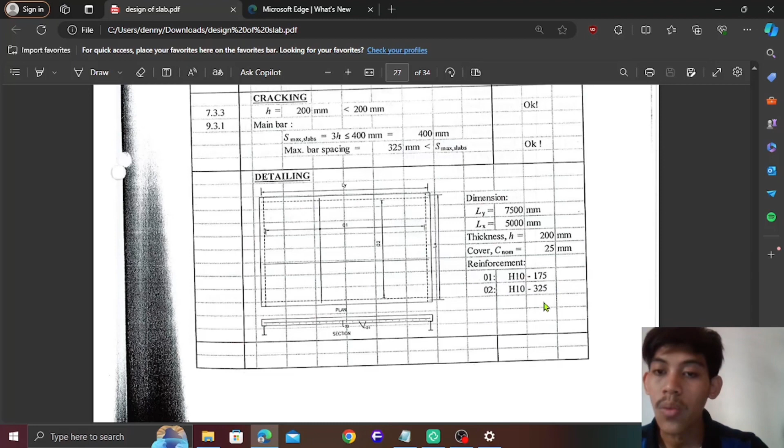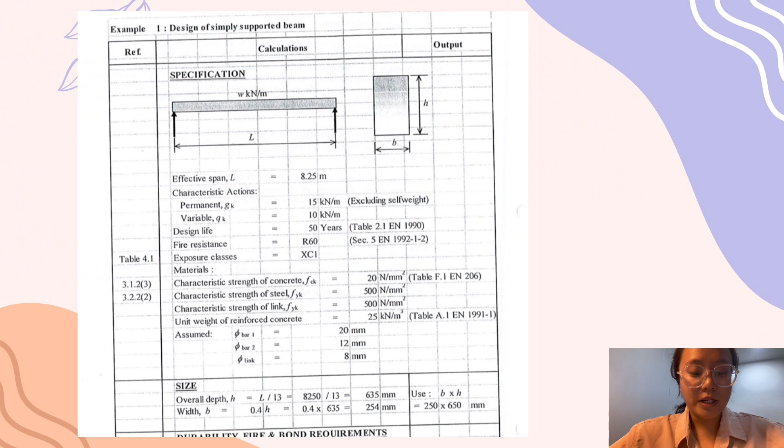We can refer to table 2.1. For the resistance, R60, exposure class XC1, we can refer to table 4.1. For materials, characteristic strength of concrete FCK is 20 N/mm square, and the characteristic strength of steel FYK is 500 N/mm square, and the characteristic strength of link FYK is 500 N/mm square.

The unit weight of reinforced concrete is 25 kN/m³. So the assumed bar for bar number 1 is 20 mm, the bar number 2 is 12 mm, and link is 8 mm.

For the size, for overall depth, H equals L over 13. We just fill in L, which we got just now, which is 8,250 over 13, and we will get 635 mm. And for the width, B equals 0.4 H, we just times them and we will get 254 mm. Then we use B times H is 250 times 650 mm.

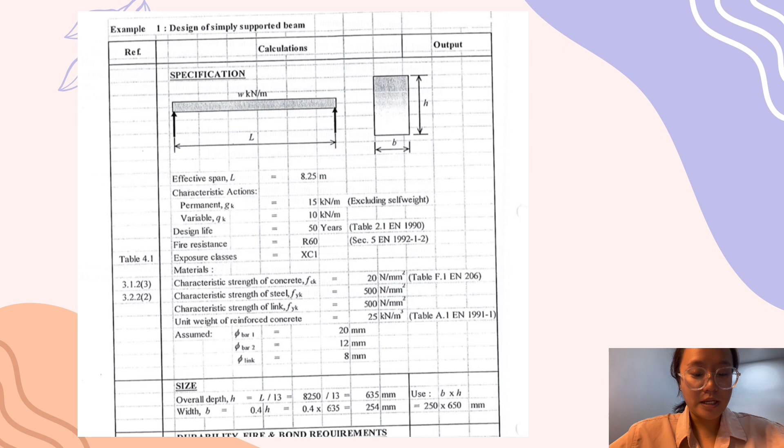Durability, fire and bond requirements. The minimum cover regard to bond is C min,b equals 20 mm, and cover regard to durability is C min,dur is 15 mm, and the minimum required axis distance for R60 fire resistant is 30 plus 10, and we will get 40 mm.

For the minimum concrete cover regard to fire, C min, using this formula, we get our answer as 22 mm. Allowance in design for deviation is 10 mm. Nominal cover, C nom equals C min plus C deviation, which is 22 plus 10 equals 32 mm. So we use C nom as 35 mm.

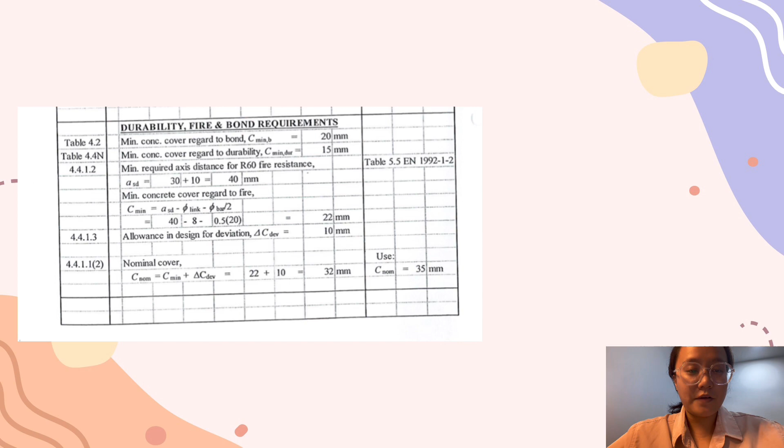Loading and analysis. Beam self-weight is 4.06 kN/m. Permanent load excluding self-weight is 15 kN/m. Characteristic permanent action GK is 19.06 kN/m, and the characteristic variable action QK is 10 kN/m. The design action is 40.73 kN/m.

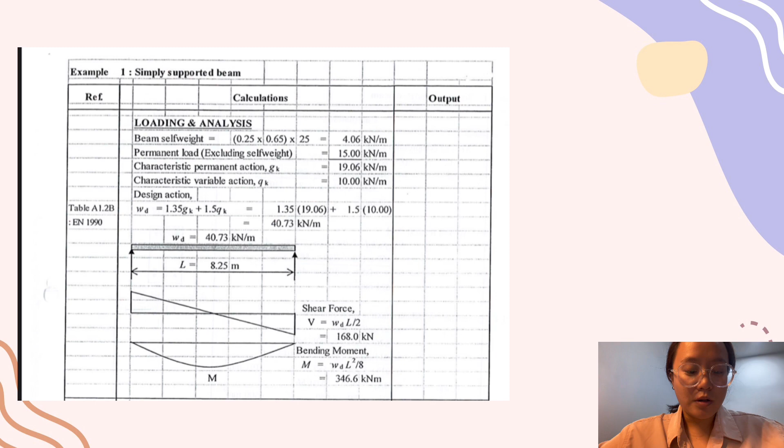So then the shear force, we use the formula below. The shear force is 168.0 kN. For the bending moment, we got 346.6 kNm.

Main reinforcement. The effective depth D is 587 mm and D prime is 49 mm. The design bending moment, MED equals 346.6 kNm. The K that we got is 0.201. So the redistribution is 0%. Redistribution ratio is 1.0. The K balance is 0.167. So compression reinforcement is required.

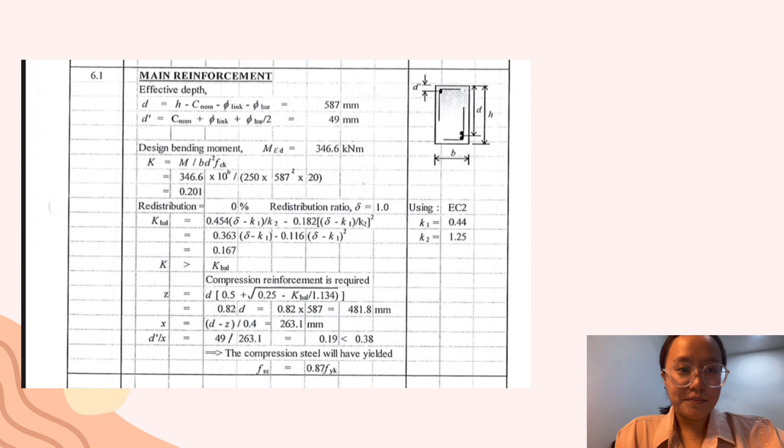Area of compression steel is 252 mm square. Area of tension steel is 1624 mm square. The minimum and maximum reinforcement area, AS min is 191 mm square and AS max is 6500 mm square.

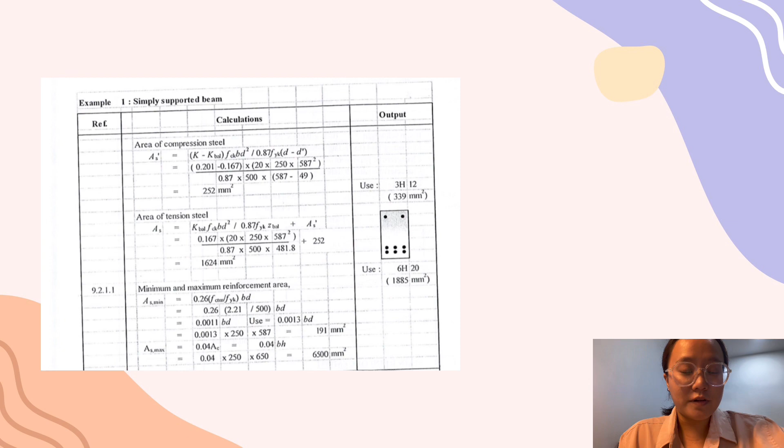Shear reinforcement, design shear force VED equals 168.0 kN. The concrete strut capacity we got is 338 kN and 486 kN.

For theta we got 10.1 degrees, so we use theta 22 degrees. Tan theta equals 0.40 and cot theta equals 2.48.

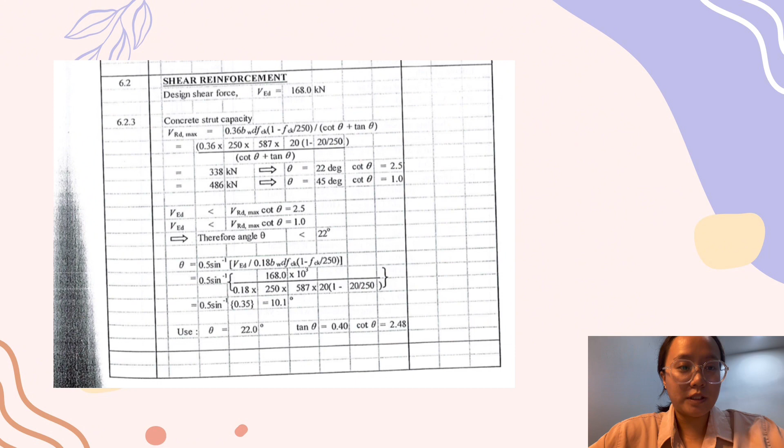The shear links we got 0.297. So try link H8, ASW equals 101 mm square. So the spacing is 339 mm.

Max spacing S max equals 0.75D, and equals 0.75 times 587. We get 440 mm. The minimum links we got is 0.179.

Then we try link H8, ASW equals 101 mm square. For spacing, we use 440 mm. The shear resistance of minimum links is 134 kN. Link arrangement - this is the link arrangement.

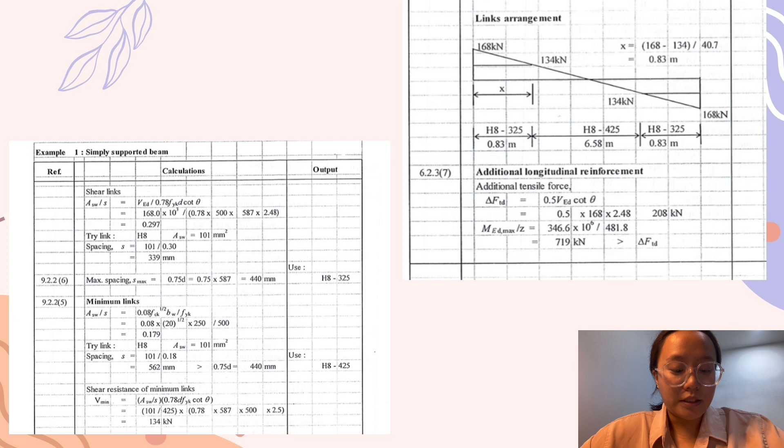So for the additional longitudinal reinforcement, additional tensile force is 208 kN, and for the MED max is 719 kN. For additional longitudinal reinforcement, AS is 478 mm square.

For deflection, percentage of required tension reinforcement we got is 0.011. For reference reinforcement ratio, we got 0.0045. For percentage of required compression reinforcement, we got 0.002. And for factor of structural system, we use K equals 1.0.

So the answer we got is 14.4. The modification factor for span greater than 7 m is 0.85. Therefore, our allowable span effective depth ratio we got 14.2, and the actual span effective depth we got 14.1.

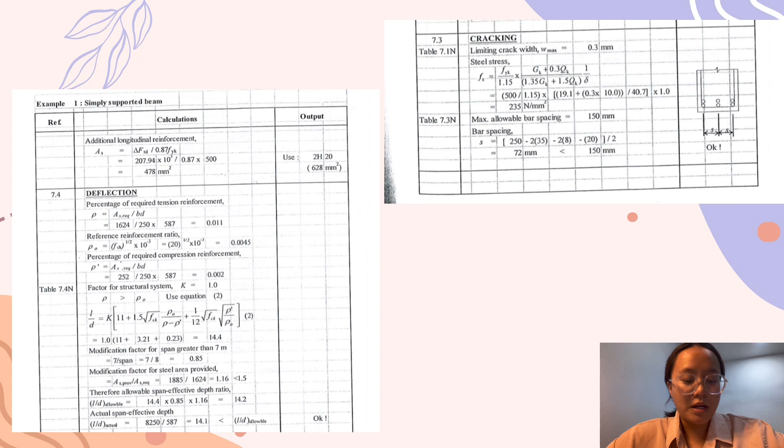For cracking, limiting crack width is 0.3 mm. The steel stress is 235 N/mm square. The max allowable bar spacing is 150 mm. The bar spacing is 72 mm.